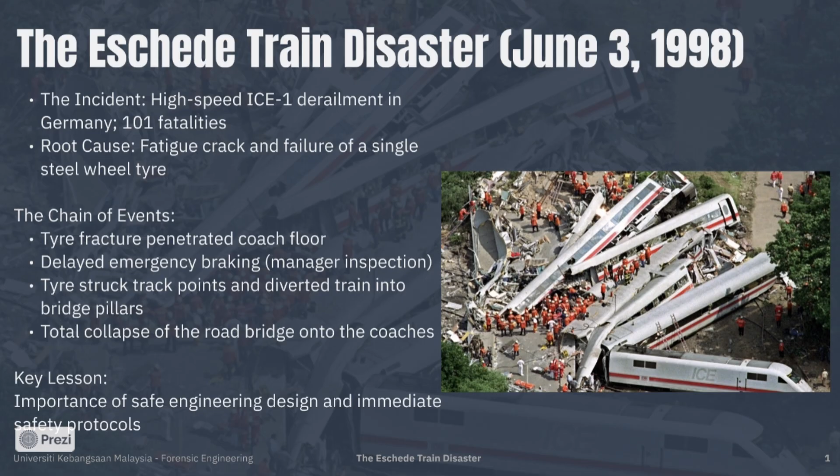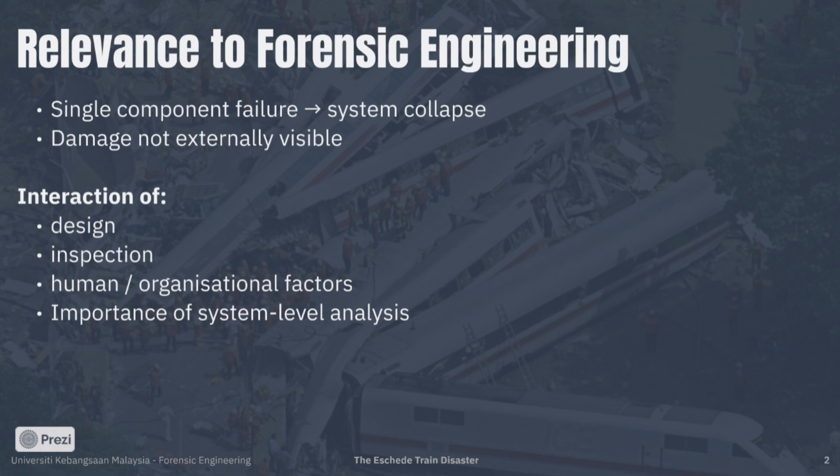Eschede is a classic forensic engineering case because it shows how a single component failure can trigger a system-wide catastrophe. The initiating failure was hidden inside a complex wheel system, so it was not immediately obvious. The case also demonstrated that failures cannot be explained by materials alone. Design choices, inspection capability, and organizational decision-making all interact, which is why forensic engineering investigates both physical evidence and surrounding maintenance and safety processes.

Our literature review is based on a few key sources. Esslinger and co-authors provide the main technical analysis of the Eschede wheel failure and identify fatigue crack growth as the governing mechanism. Richard adds fracture mechanics insights and explains why rubber-sprung wheels can develop critical stress concentrations. Suresh provides the fundamental fatigue framework. Cracks can initiate and grow under cyclic stresses even below yield strength over many cycles.

Ekberg and Kabo describe realistic railway wheel loading. Rolling contact combined with bending and vibration creates a fatigue-critical environment. Finally, Zerbst and colleagues highlight why inspection strategies must be linked to crack growth and detectability, otherwise critical defects can be missed. These are our main references for the technical explanation and the forensic interpretation. We also used several additional papers to support specific details, and all of them are listed in the report's reference section.

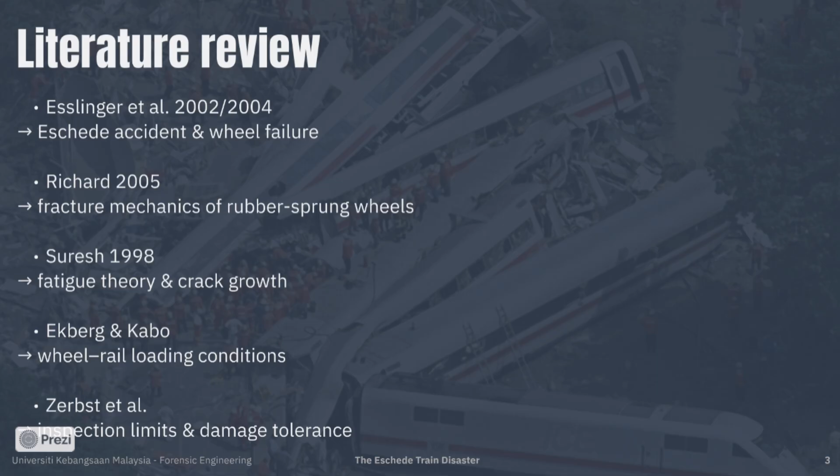The investigation followed a structured forensic approach. Investigators began with a site survey and debris mapping to reconstruct the sequence of events without early bias. Evidence preservation was critical. Wheel sets were secured for laboratory analysis, and operational data such as speed records, maintenance history, and inspection logs were collected.

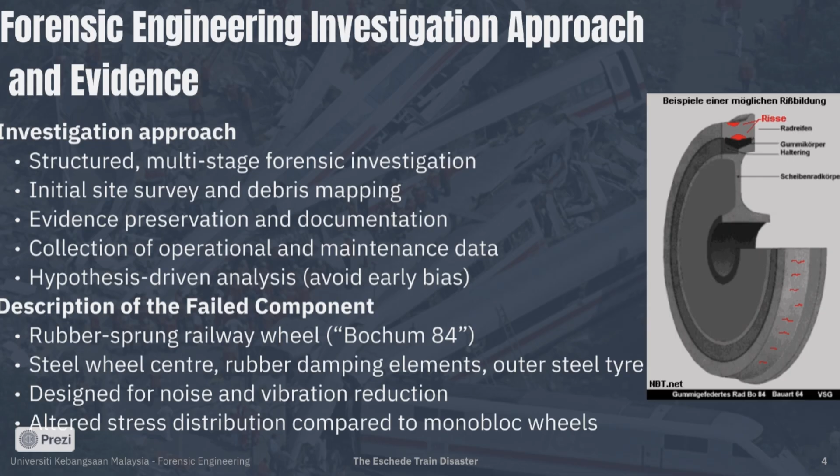The failed component was the rubber-sprung wheel, known as the Bochum 84 design. It consists of a steel wheel center, rubber damping element, and an outer steel tire. The design reduces noise and vibration, but it also alters the stress distribution compared to the monobloc wheel. In service, railway wheels experience complex cyclic loading. Rolling contact at the wheel-rail interface, bending from vertical and lateral forces, and vibration create fluctuating stresses over millions of cycles. This is exactly the environment where high cycle fatigue develops.

To prove fatigue and reconstruct the failure, investigators use a combination of methods: visual inspection to locate crack origin and identify beach marks, SEM fractography to detect fatigue striations that confirm cyclic crack growth, and non-destructive testing, such as ultrasonic and eddy current methods. For forensic quality, evidence handling is essential. Fracture surfaces must be preserved, and samples are taken from initiation, propagation, and final fracture zones. Documentation and chain of custody ensure the results remain reliable and defensible. With that, we move to the findings.

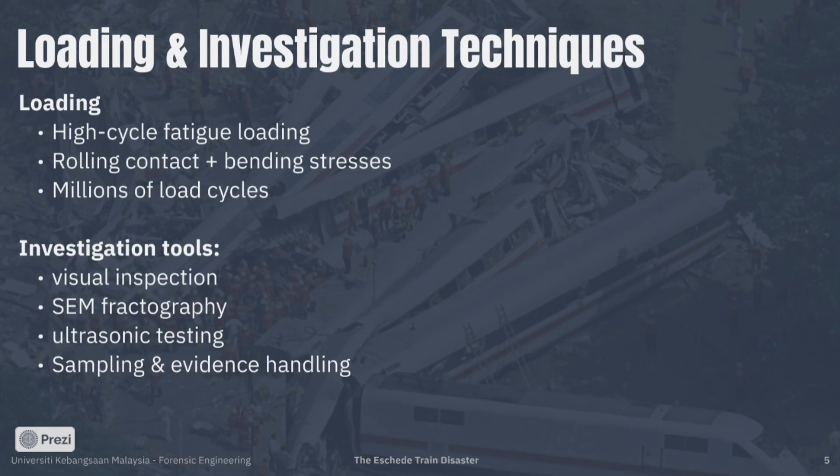Our findings show the wheel tire failed by fatigue, not by a sudden overload or impact. The fracture is circumferential and indicates progressive damage accumulation. The crack initiated at the inner surface of the wheel tire, which is consistent with the region of high tensile stresses during high-speed operation. Beach marks on the fracture surface show long-term crack growth over time. At the point of final failure, the crack had reached roughly 80% of the tire thickness, leaving only a small remaining ligament that could no longer carry the operational loads. Microscopically, fatigue striations confirm stable cyclic crack propagation, and importantly, no material or manufacturing defects were identified at the initiation site. This supports a service-induced fatigue process rather than a production flaw.

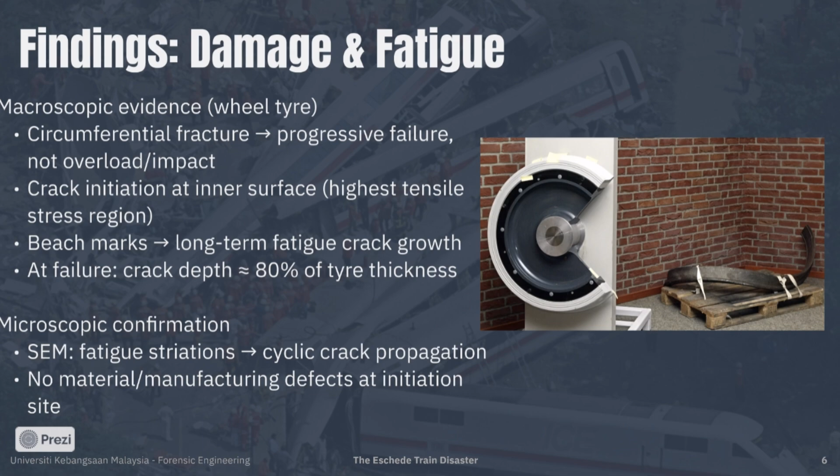The immediate cause was the fatigue fracture of the wheel tire after the crack grew to a critical size. The key forensic question is why it was not detected earlier. First, the crack initiated at an internal location on the inner surface. This is not visible during routine visual inspections, yet visual checks were the primary inspection method. Second, inspection capability had technical limits. Ultrasonic testing on mounted wheel sets can have reduced sensitivity because the axle-wheel interface attenuates the signal. This means smaller cracks may not be detected reliably, especially if inspection intervals are long.

On top of that, organizational factors contributed. Warning signs such as noise and vibration were not interpreted and escalated as indicators of imminent failure. Overall, Eschede is a classic forensic engineering case because multiple layers, technical, inspection-related and organizational, failed together.

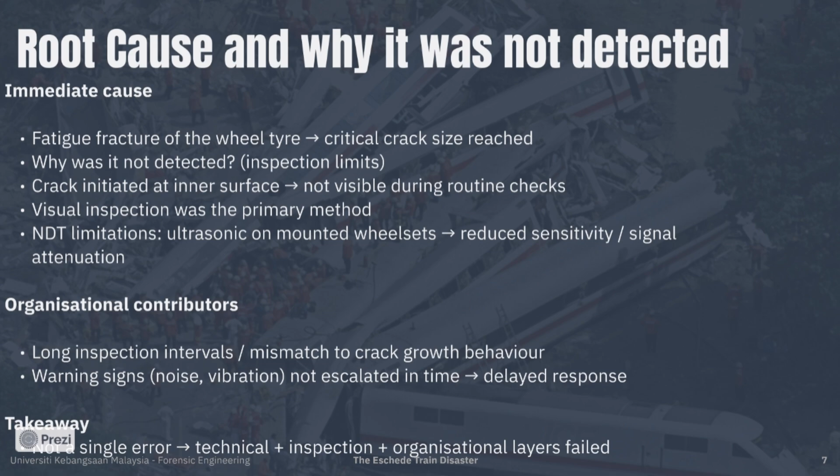To conclude, the Eschede accident demonstrates that catastrophic failures rarely come from a single defect. Material quality was adequate and there was no evidence of manufacturing defects at the crack initiation site. The failure developed as a predictable fatigue process under normal service loading with long-term crack growth at an internal location. The disaster occurred because the damage remained undetected due to inspection limitations and was compounded by organizational decision-making and delayed response to warning signs. The core forensic lesson is to analyze the whole system: component, design, inspection capability, and organizational process.

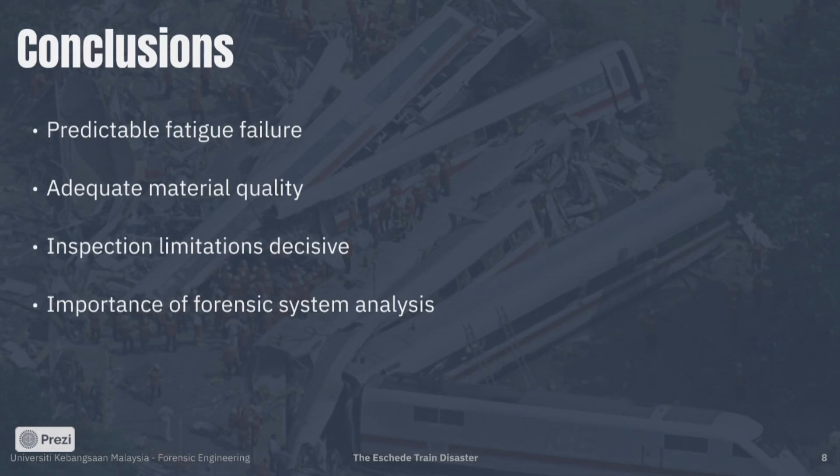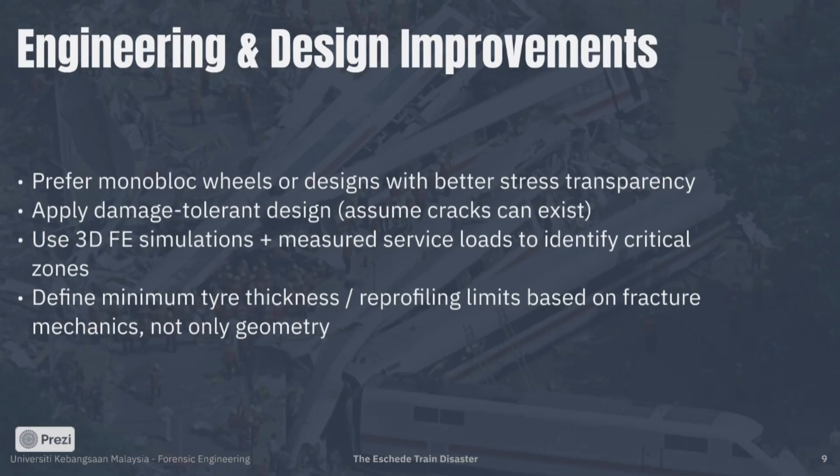Our first recommendation focuses on engineering and design. Innovative wheel concepts must be supported by design rules that reflect their real mechanical behavior. In safety-critical components, we should apply damage-tolerant design principles, meaning we assume cracks can exist and still ensure safe operation. This requires realistic service load measurements and three-dimensional simulations to identify critical stress regions early. Based on that, safe limits such as minimum tire thickness and reprofiling criteria should be defined using fracture mechanics considerations, not only geometric limits.

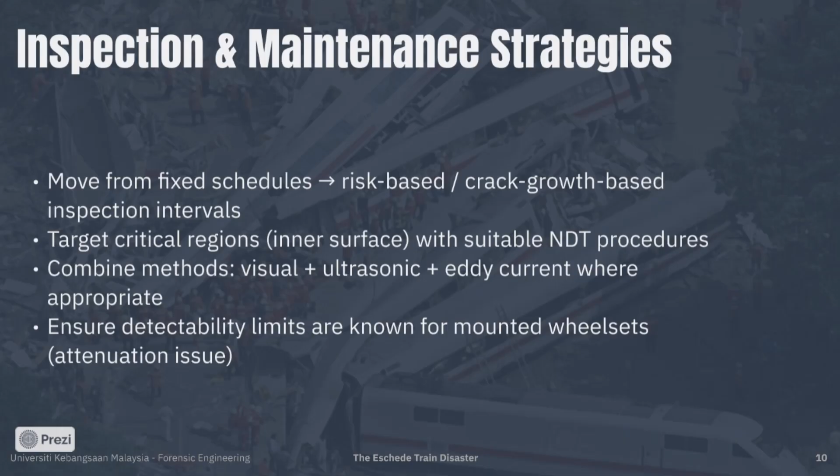Second, inspection and maintenance strategies must be adapted to fatigue crack growth. Fixed time-based routines alone are not sufficient. Inspection intervals should be linked to expected crack growth behavior, especially in high-risk regions where cracks initiate internally. In addition, NDT procedures must account for detectability limits. For mounted wheel sets, ultrasonic sensitivity can be reduced due to signal attenuation at the axle-wheel interface, so inspection procedures and thresholds must be validated for the actual assembly. The goal is to detect cracks well before they reach critical size.

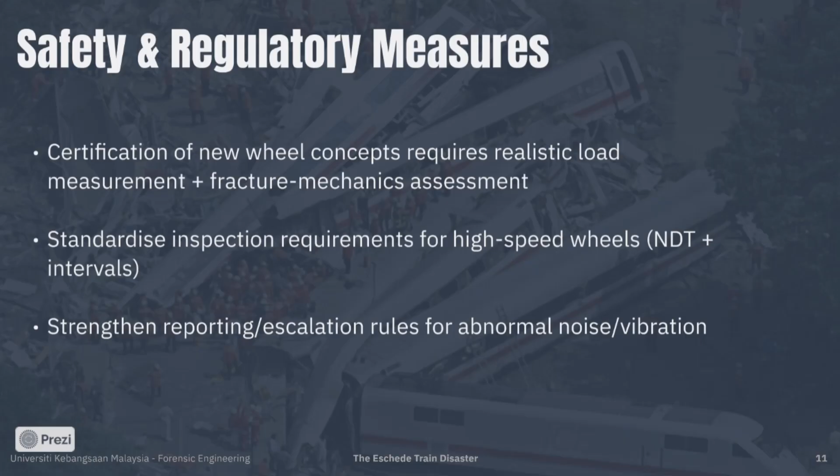Third, safety and regulation must evolve alongside technological innovation. New component concepts should only be approved after realistic load measurements and fracture mechanics-based damage tolerance evaluations. Regulatory frameworks should standardize inspection requirements for high-speed wheels, both the methods and the intervals, and strengthen reporting and escalation procedures when warning signs such as abnormal noise or vibration occur. Overall, Eschede shows that safety depends on design, inspection, and organization working together.